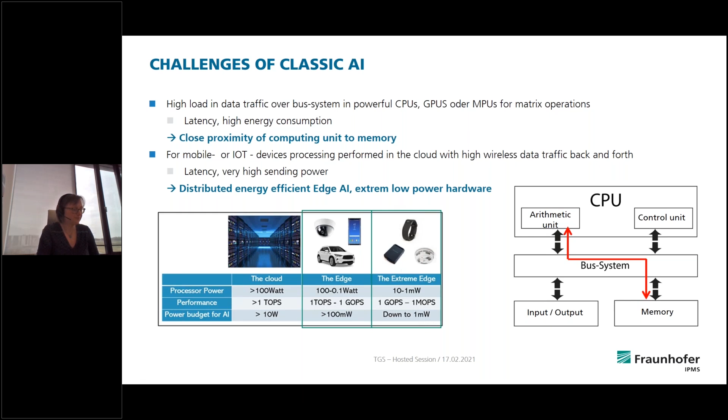Here the solution for future edge AI applications would be a distributed, energy efficient edge AI, and for that you need extreme low power hardware. Here you can see some applications of edge AI: image recognition for autonomous driving, voice recognition in the consumer or medical field, but also intelligent sensors in industry. All these applications need AI, but they need low power. They need decentralized, reliable processing. They need security, miniaturization and low cost. So this is the field of edge AI.

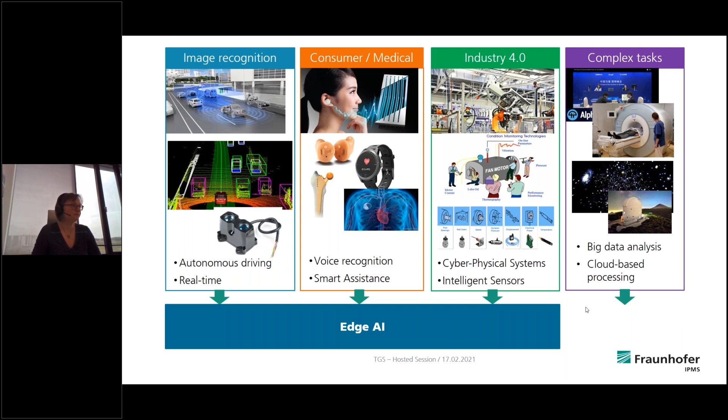There, CNT sees its contribution by neuromorphic computing, mainly implemented on neuromorphic hardware. I wanted to give some notes on the field of neuromorphic computing itself. Neuromorphic computing is one of the main solutions for energy efficient AI, while being able to address novel situations and make abstractions like a human being. It combines the emulation of the neural structure of the human brain with probabilistic computing, which creates algorithms to deal with uncertainty, ambiguity, and contradiction of the natural world.

The key challenge is matching the human's flexibility and ability to learn from random signals with the energy efficiency of the human brain on chip level. That is the crucial thing. In this field there have been several evolutions in the last years; everybody speaks about 3 generations. Generation 1 can be equated to machine learning algorithms, but already the second generation, using deep neural networks, goes to so-called in-memory computing and new hardware architectures to realize very high energy efficiency and parallelism, and that means high performance.

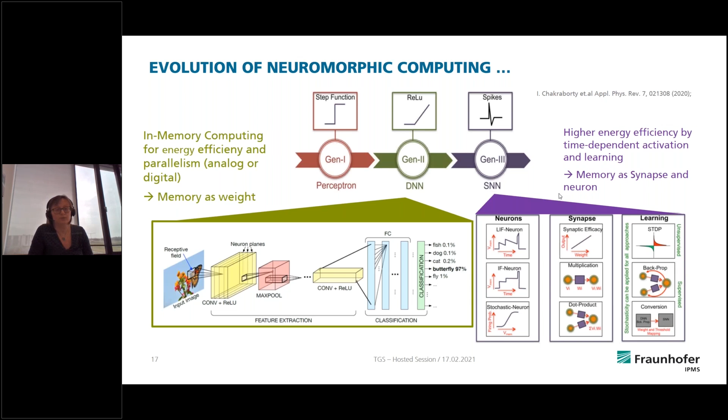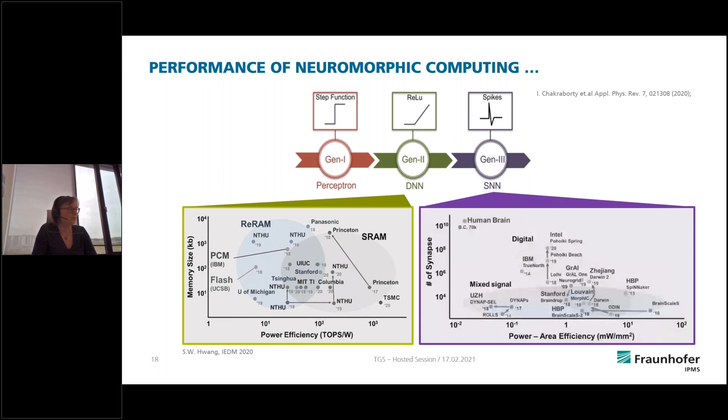Here you can see there are already many developments worldwide with a wide spread of performance and energy efficiency outcomes, but all of them are still far away from human brain performance. So how can we as Fraunhofer IPMS contribute to this topic? We develop neuromorphic hardware to implement second and third generation neural networks. We develop energy efficient microchips mimicking the human brain.

We focus mainly on the development, integration, architectures, and designs of low power non-volatile memories as the basic device for all of these neural networks, for example as weight, as synapse, or as neuron. And we see the so-called ferroelectric field effect transistor based on ferroelectric hafnium oxide as the most promising candidate for future processors.

Why do we do that? Ferroelectric hafnium oxide was discovered in Dresden many years ago, and the developments on FeFET we could really accompany from the beginning on. Now, hafnium oxide is a really intensively studied material worldwide, and we study this material for the application as so-called FeFETs, ferroelectric field effect transistors.

These FeFETs are ultra low power, low latency, cost-effective, non-volatile memory bit cells. There exists already the implementation for the 28 nanometer high-K metal gate and 22 nanometer FDSOI technology of GlobalFoundries. The advantages of this memory are a very high memory window, a very high on/off ratio. You need really low write power, and you also already have a very good device-to-device variation and good

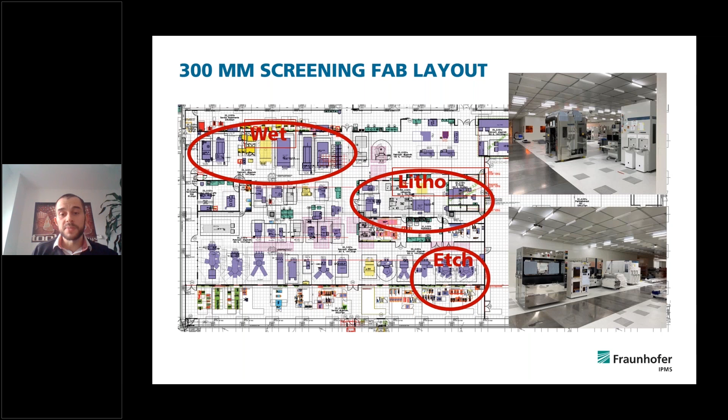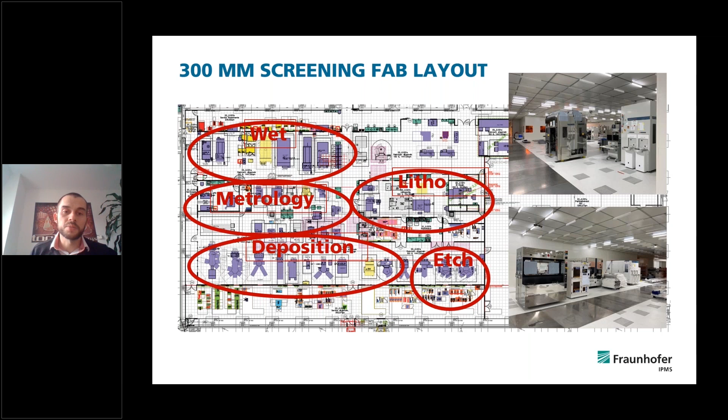We have different modules in this clean room. We have all the equipment for wet processing, that means plating, CMP, wet etch. We have a litho cluster centered around our 300 millimeter e-beam direct writing. We have a few tools for plasma etch, a lot of tools for various deposition techniques like ALD, CVD, or PVD. And of course, we need metrology to characterize our process and have qualified results.

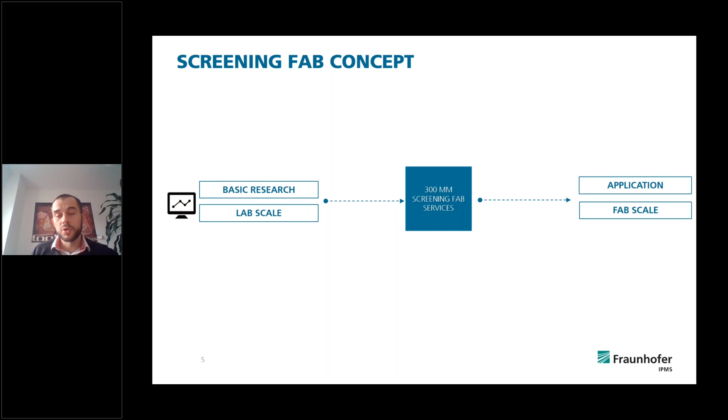What is the concept behind the screening fab? So with the screening fab platform, we want to bridge the well-known gap between fundamental research and manufacturing. So what we want to do and what we have done is take up very good ideas from fundamental science, from the lab scale, and put it into manufacturability and into the fab scale, basically.

We do this with many partners from the semiconductor industry. For example, for material suppliers, we offer our capabilities so they can really qualify or enhance the value of their product. For example, if they want to introduce a new cleaning chemistry to their customer, they can come to our facilities, test their new products on really industry-grade equipment, and get meaningful wafer level data to present to their customers.

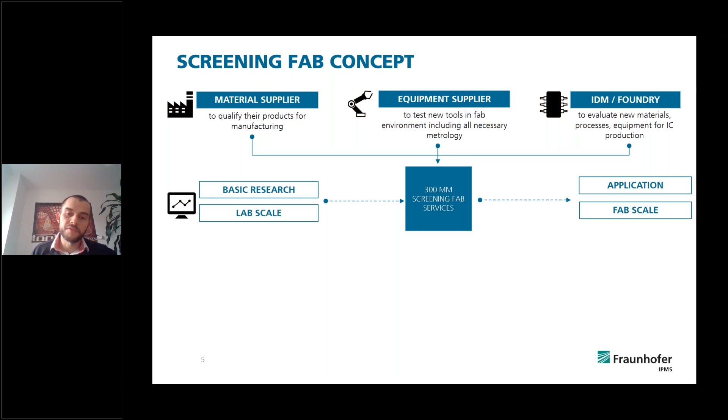And on the other hand, we also work with the IDMs and foundries. So for example, the foundry can test or optimize their processes. They can look and screen for new chemicals at our site, so they don't have to pull their tools out of production. They can basically save time and money by doing this at our site, and they can send their wafers to us. And the third possibility is, of course, for equipment suppliers, where we offer our infrastructure. We have all the needed pre and post processes and the metrology you need for this.

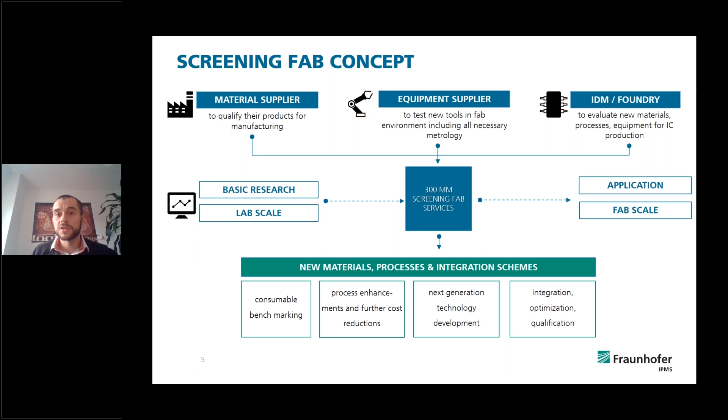So with this screening fab, we cover a wide range of material, process and integration solutions, from consumable benchmarking to more research like new technology development, but also reducing costs or increasing the yield of the products.

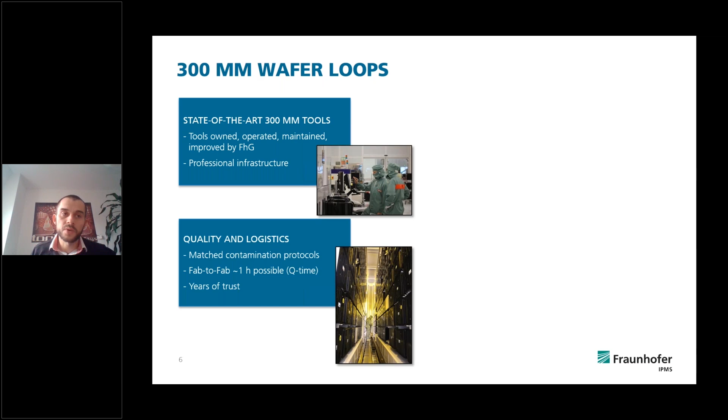Special mention maybe to our wafer loop concept. With our state-of-the-art 300 millimeter clean room, we have established several protocols regarding contamination and quality. And in the past, we have shown with one of our biggest foundry partners, GlobalFoundries, that we really match their processes.

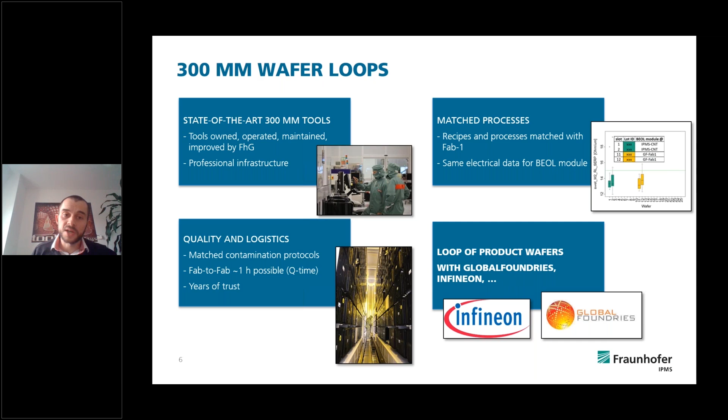So we could show that we basically get the same electrical data when the wafers run through our fab, for example, in the back-end of line module, compared to when the wafers run through Fab 1 in Dresden. And with this, we are able to really loop product wafers with major companies like Infineon and GlobalFoundries.

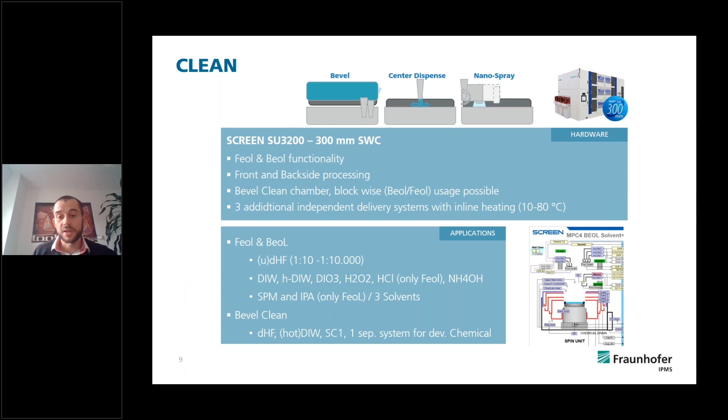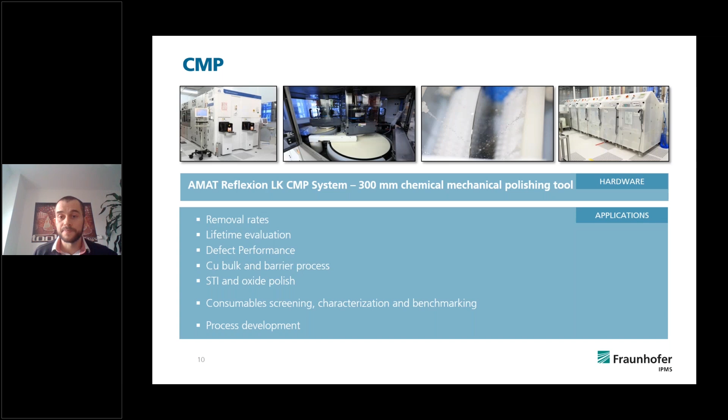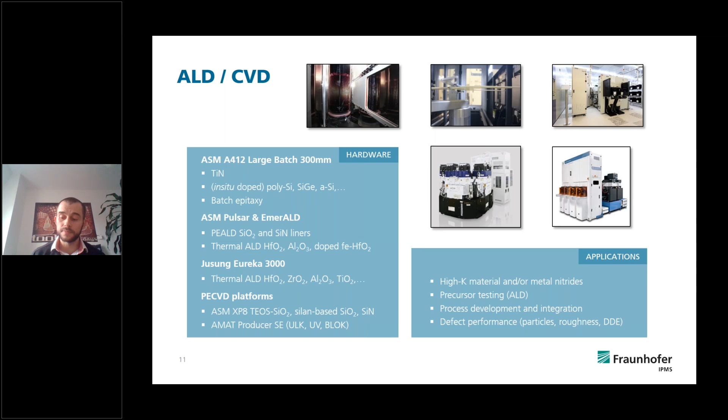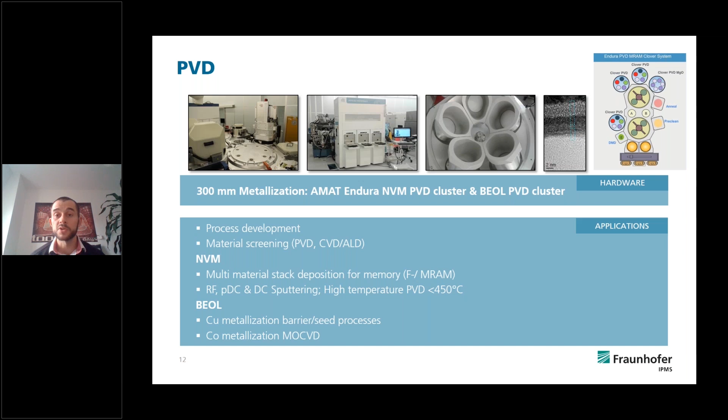And recently, we acquired a new Endura platform with several Clover-based chambers, which can support up to 5 different PVD targets. And with this platform, we are able to really target state-of-the-art research for advanced spintronic devices like MRAM, for example.

For all these processes, of course, you need the appropriate metrology and analytics. So we have the inline cleanroom metrology you need, like thin film measurement, defect measurement, and resistivity measurements, and so on. But we also have a few analytic labs for really advanced nano analytics.

And some special mention there maybe to our new SEM supplied with an EBSD detector and a new TKD detector for really compositional analysis, and AFM with the possibility to do piezo force mode for our ferroelectric applications, and a new XPS system with a double chromatic source.

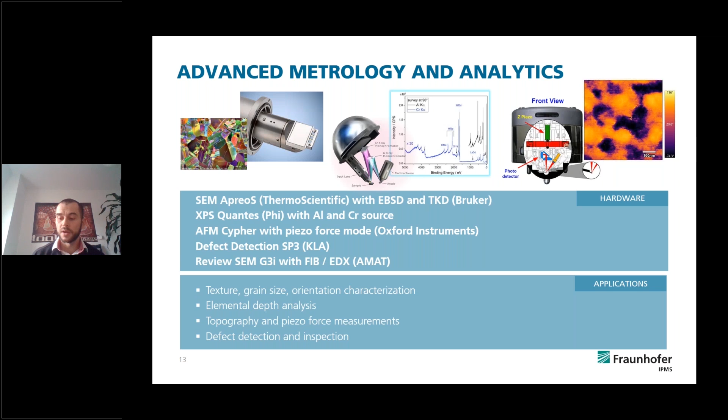Last but not least, we have a huge variety of electrical characterization and test, from really coupon level to automatic wafer probers with 200 and 300 millimeter wafer uptake. The main applications here are non-volatile memory characterization, but also interconnect and reliability tests. And in the near future, we will upgrade even to magnetic material and device tests and cryogenic probing.

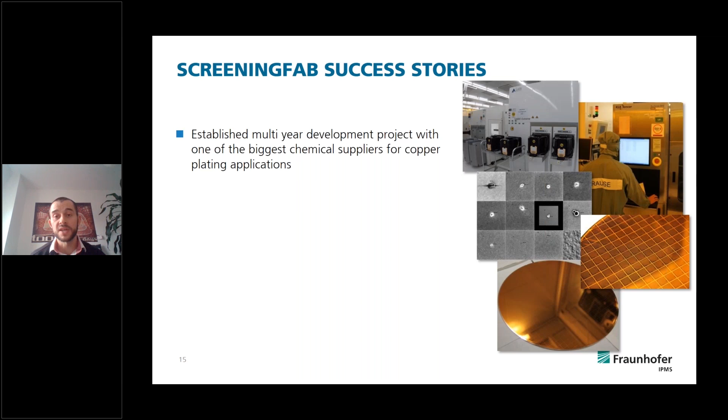So maybe at the end, some success stories of our screening fab from previous projects. During the last years, we established a multi-year cooperation with one of the largest chemical suppliers for copper electroplating chemicals. So we really enhance their products in that they send us their chemicals and we provide them with 300mm wafer level data so that they can further improve their products.

We have a strong partnership with semiconductor manufacturing foundries and IDMs. For example, in the CMP consumable benchmarking field, we did a very large benchmark project for CMP consumables. And in the end, the winner of this project really became the POR of this foundry. But not only for big foundries, but also for smaller companies.

We work together with a regional company who develops phase fluids, which physically remove layers. And we enabled them through several projects to really get a foot into the microelectronic industry.

So with this, I want to present you again the advantages of our screening fab. With us, you can get wafer level data and benchmark your product through our state-of-the-art CMOS clean room with the appropriate metrology and analytics. We have really fast development cycles and high tool availability. And with our established contamination and quality protocols, we are even able to loop real production wafers with our partners.

There's strict IP management, no data gets out to third parties. And with our scientific knowledge and engineering knowledge in our network, we would be happy to really work together with

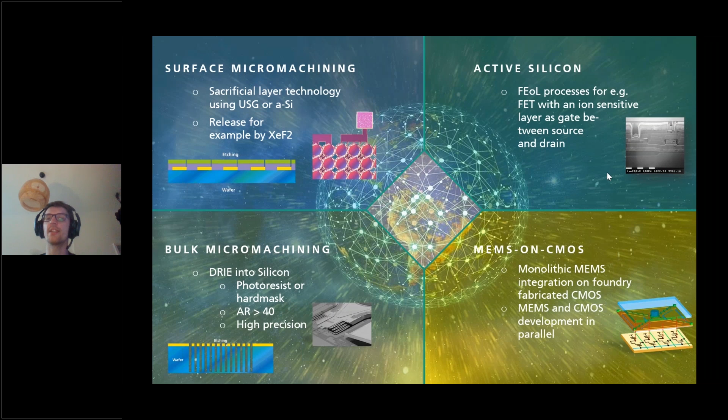What becomes more and more important to the MEMS manufacturers, also for us, is the integration of MEMS on CMOS. That means you get a CMOS by a foundry, for example, X-FAB, and we build on top the interconnection, and once the interconnection is done, we can build on top the MEMS device to shorten the time to market for our customers, and also to increase the density on the wafer to get more devices done.

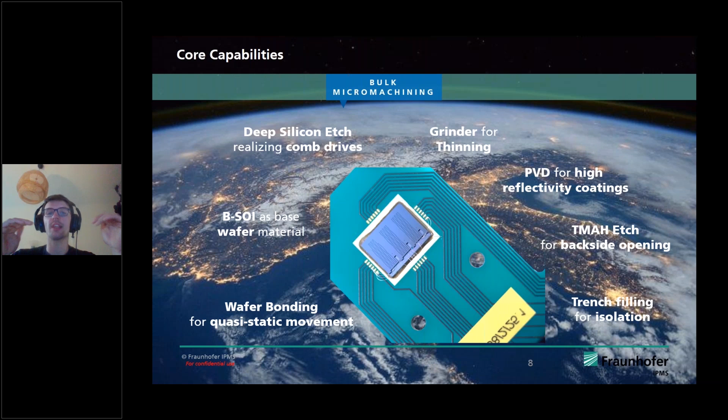Also, we use PVD to get all these reflectivities on the devices. Those technologies mainly use BSOI wafers as base materials and grind them down later in the process.

And on this part, we recognized in the past that BSOI wafers are in high demand in the market, and we had long lead times to purchase those kinds of wafers, and this was the point where we figured out whether it's possible to get those wafers on our own for our own devices, and we did those wafers on our own.

And now what comes to our mind is that we could use those self-made BSOI wafers and customize them with things that we are strong in. That means that we get those wafers with features such as cavities or buried metallization. And so this is what we focus on when we do BSOI wafers on our own, to achieve the requirements for highly sophisticated devices.

Therefore, we have had the chance to get a grinding tool via the FMD, which was also already mentioned by Benjamin Ulrich recently. The FMD is a society which brings all the Fraunhofer institutes together which are working in the field of silicon.

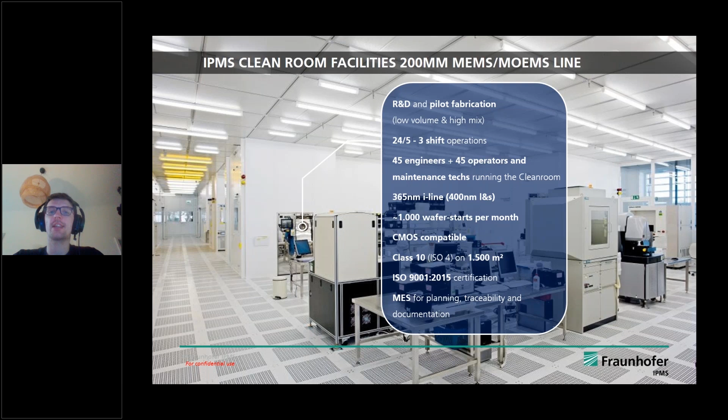Our newest highlight, the deep UV cluster. But what is important for us is that we have a lot of wafer starts per month, around 1,000 wafers per month, which is a very high number for an R&D clean room, which also shows that we do pilot fabrication. We are CMOS compatible, as I said, and we are ISO 9001 certified.

Here is our newest tool, which is the deep UV scanner. We have a dedicated coater and track for this deep UV scanner, and there we get new resolution levels, which means that we can achieve 130 nanometer lines and spaces with this tool.

And we also had the chance with the FMD to get the measurement tools within this purchase, which means that we have a new overlay tool, and our CD-SEM tool is able to work together with this tool.

Maybe you have seen this already on our Fraunhofer IPMS LinkedIn profile. There is an interesting video about how we got this tool into the clean room over Christmas. This video shows the big challenges of getting such a tool into a clean room.